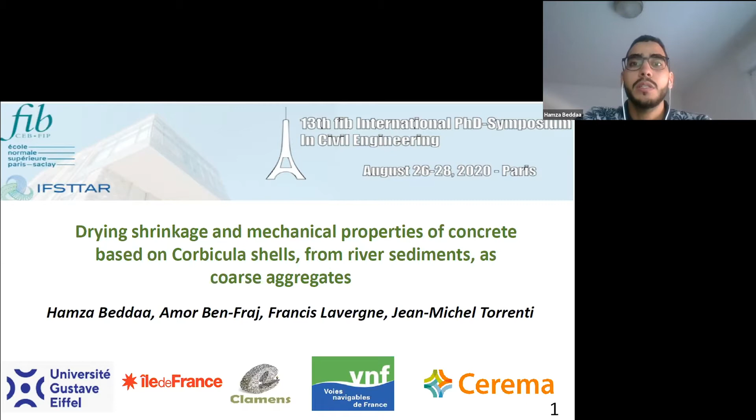So I'm going to present today one of our research results, which deals with the effect of the substitution of coarse aggregate by shells from river sediment on the drying shrinkage and the mechanical properties of concrete. So the sediments studied in this thesis are the sediments generated by dredging operations carried out in the Île-de-France waterways. These dredging operations, which are essential to ensure the transport of boats, generate an annual volume of about 150,000 cubic meters. So these materials are considered as waste, while the analysis shows that 100% of these materials are non-hazardous and 90% are inert.

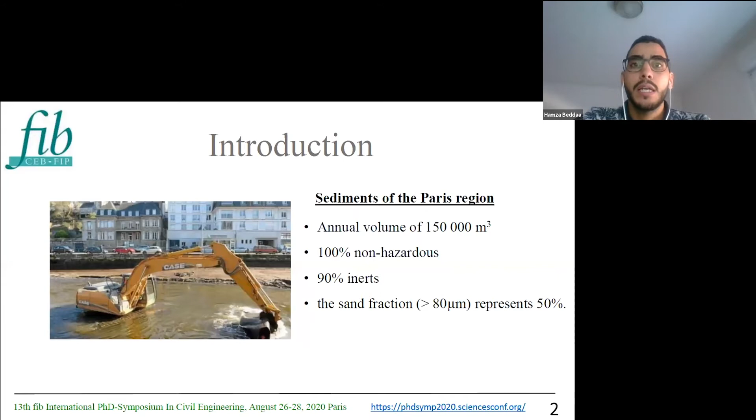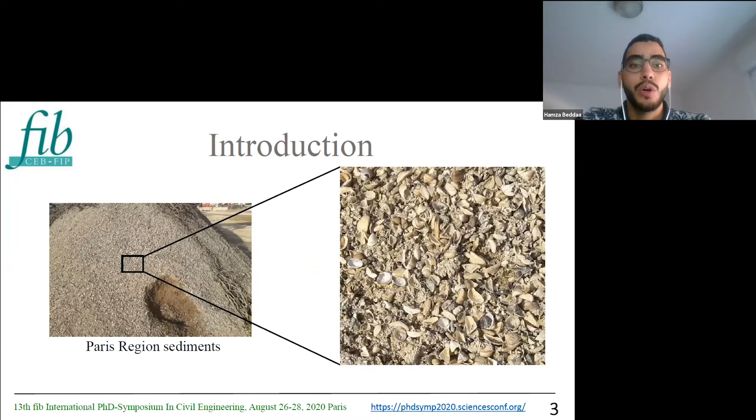And the sand fraction of these materials represents 50% of the total volume. So all this information favors the valorization of these materials in concrete as aggregates. However, this new local resource of aggregates may contain a significant fraction of shells, which can have an impact on the concrete properties. So the shellfish species present in the waterways of the Île-de-France region are Viviparus, Dreissena, Corbicula. Viviparus and Dreissena are light and can be easily removed by blowing or floating, whereas Corbicula are dense and it is difficult to separate them from the sediment by a practical way.

So the incorporation of sediments into concrete means the presence of this type of shells in the mixture, and then the study of their effects on concrete properties is important. So these shells are from 4 to 20 millimeters, the same granular class as coarse aggregate. So we will study the effect of the substitution of coarse aggregate by shells on the concrete properties. So comparing the properties of the shells with those of the coarse aggregate, we can say that shells contain less fine elements. We can say also that the density is less for the shells, and they absorb more water than coarse aggregate.

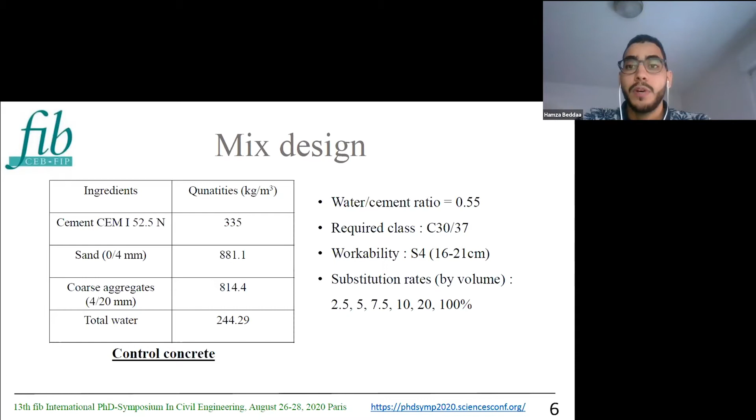Concerning the flakiness index of shells, it reaches the maximum, which is 100%. So this flattened shape of the shells requires more paste volume to cover them, which could affect significantly the concrete properties. So the control concrete in this study is a concrete of C30 class with a good workability S4 slump class, using a water to cement ratio of 0.55. This study is carried out on 7 concretes, one control concrete and 6 concretes based on shells. The volume substitution rates used in this study are 2.5, 5, 7.5, 10, 20, and 100%.

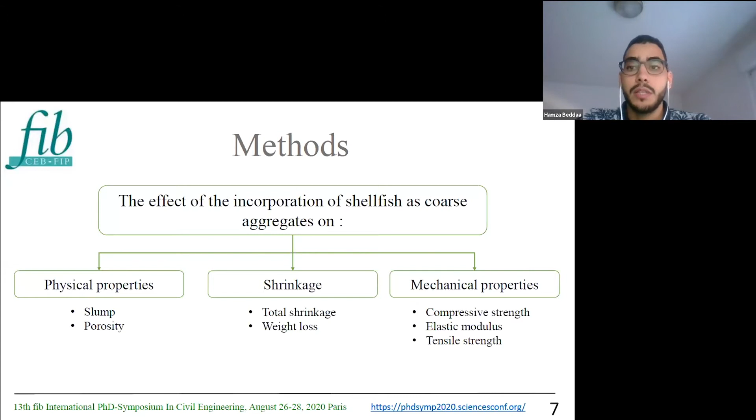The properties studied for these concretes are slump, porosity, drying shrinkage, and weight loss. Regarding mechanical properties, compressive strength, elastic modulus, and tensile strength by splitting are also measured. So we will start with the results of the physical properties. The slump of the fresh concrete was measured using the Abrams cone, and the results show that up to 20% of substitution, the slump of the concretes based on shells is similar to that of the control one. However, a significant decrease of the slump was measured for a total substitution of coarse aggregate by the shells. So the decrease could be attributed to the important paste demand of shells due to their high specific surface area.

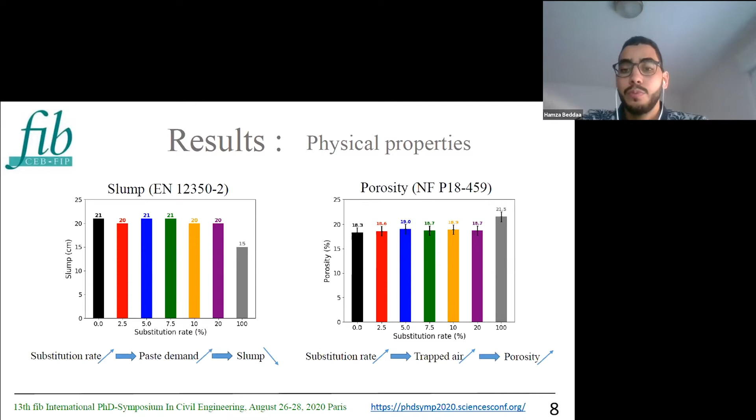So concerning the porosity accessible to water, the results show that the porosity remains unchanged for substitutions lower than 20%, but for a total substitution, we can see a significant increase in the porosity. This result can be explained by the fact that up to 20% of substitution, the air trapped by the shells is negligible compared to the porosity of the overall concrete, while the total substitution of the coarse aggregate by shells makes this effect and this porosity much more pronounced. So the shrinkage test is carried out on prismatic samples of 7x7x28 centimeters.

Show that replacing up to 20% of coarse aggregates by shells doesn't affect the concrete drying shrinkage evolution. And the weight loss over the 3 months has been also measured on the same prismatic samples, and the result of this parameter is coherent with those of the shrinkage. So there is no effect up to 20% of substitution. This finding can be attributed to the use of the same water to cement ratio and the same mortar volume fraction for all concretes.

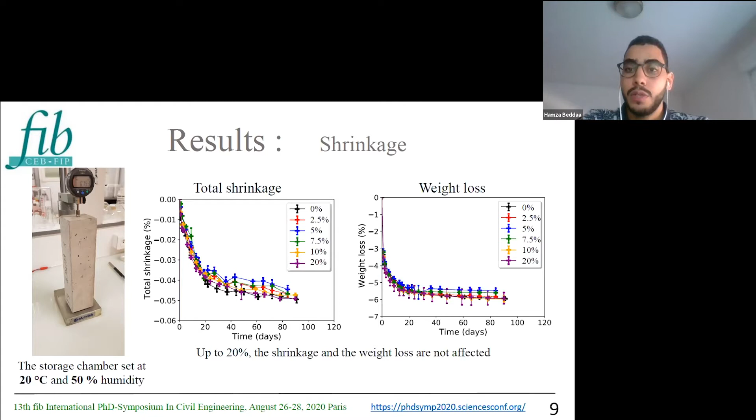For mechanical properties, we start with the compressive strength. The compressive strength was measured on cylindrical samples, and the test was carried out at 28 and 90 days. So for the result, the compressive strength decreases as the replacement rate increases. This decrease is significant, and it is about 21% for a substitution rate of 20% and reaches 62% for a total substitution.

So the effect of shells on the compressive strength of concrete has been the subject of several studies, and the decrease of this property has been attributed to the fragility of shells, which doesn't seem the case for the shells used in this study, or it was attributed to the increase of the concrete porosity, and this explanation also may be the case for the total substitution, but up to 20% of substitution, the effect on the porosity of concrete is negligible, while the compressive strength decreases significantly.

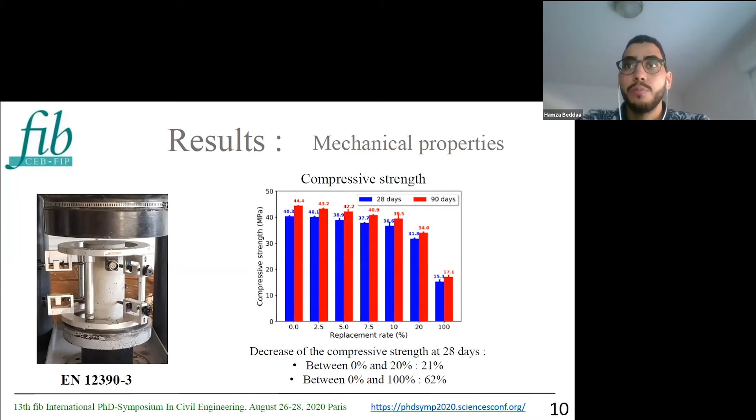But the possible explanation for this decrease seems to be the weak bond between the shells and the mortar. Actually, the observations of the bond between the inclusions and the mortar in a concrete sample show a difference between the adhesion quality of coarse aggregate and that of shells. So an absolute lack of adhesion here and here,

or even detachment could be observed between the mortar and the shell, especially on the outer face of the shell. For the inner face, a high porosity could be observed because of the shape of shells, which favors the air trapping. So the lack of adhesion between the mortar and shells could be the main reason for the decrease of the compressive strength.

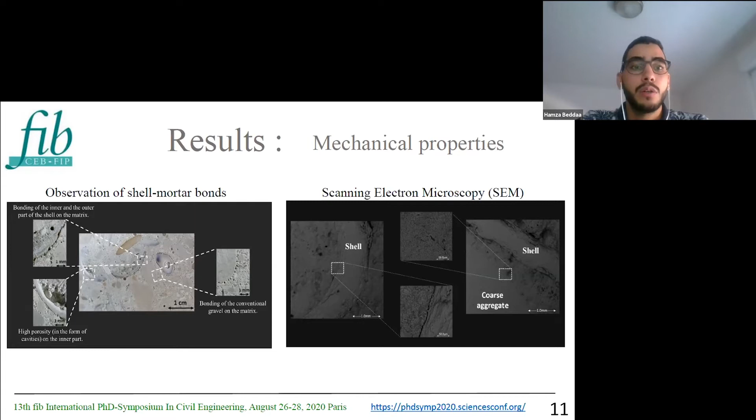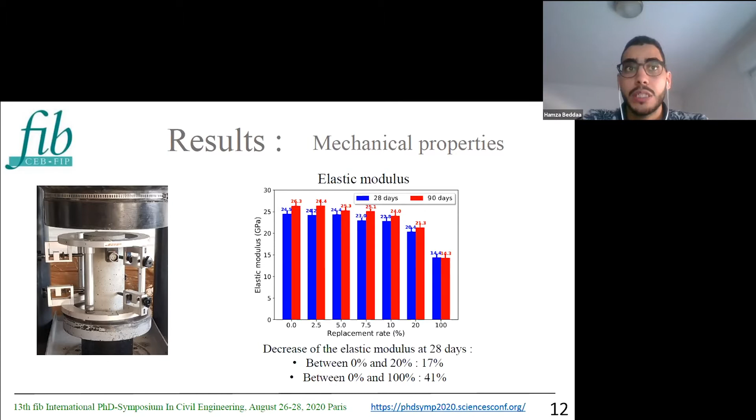So the elastic modulus was measured on the same samples dedicated to the compressive strength. The elastic modulus values follow the same trend as the compressive strength. The possible explanation for this decrease is also the weak adhesion between the shells and the mortar.

The tensile strength by splitting was measured on the cylindrical samples. The error bar of the obtained result is significant, but the averages of this result show a clear trend regarding the effects of the shells on this property. So the tensile strength decreases significantly with the increase of the replacement rate. In fact, this property reflects the adhesion quality between the aggregate and the mortar, and its decrease confirms the weak adhesion between shells and mortar.

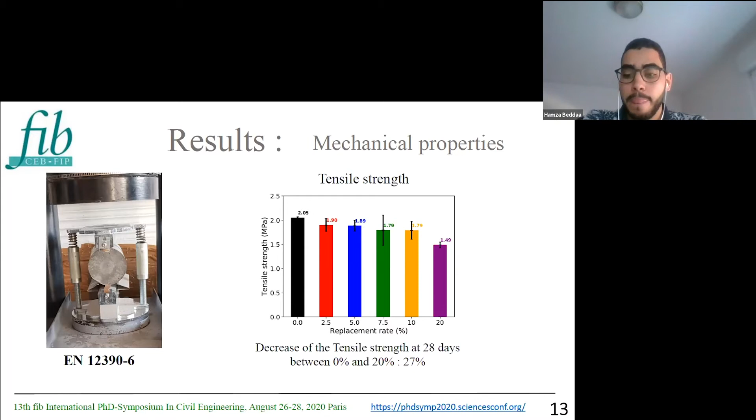So I add to this presentation a simple theoretical part in order to show that if we consider a lack of adhesion between the shells and the mortar, the Mori-Tanaka scheme can provide equivalent values to those found experimentally. So first, the elastic moduli of the different phases are measured. The elastic modulus of the mortar is measured in the same way as the concrete, while the elastic moduli of the inclusions are obtained from the micro indentation test. The Poisson's ratio is considered equal to 0.2 for all phases.

So assuming that the inclusions have a spherical shape, either coarse aggregate or shell, the homogenized modulus of the concrete can be calculated using the Mori-Tanaka scheme for the different substitution rates. The figure shows three elastic modulus values for each replacement rate. One corresponds to the experimental value, and the two others correspond to the theoretical values. The bars in red correspond to the case of a perfect adhesion between the shells and the mortar, while the bars in blue correspond to the case of a detachment between the shells and the mortar.

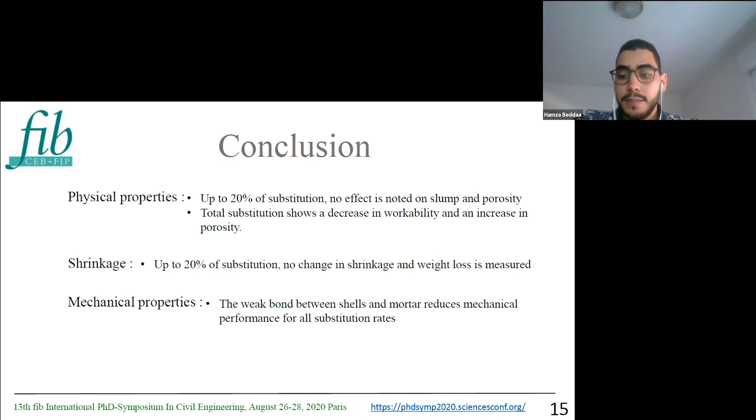In contrast, mechanical properties decrease for all substitution rates. This decrease has been attributed to the weak adhesion between the mortar and the shells. This is the end of my presentation, and thank you for your attention.

So thank you very much for a very interesting presentation. And now we will start with questions. So maybe I will start with one.

In fact, you mentioned that you are using the shells in full size, but you also mentioned that because of the shape of the shells, there is more danger of air bubbles inside the shells, and that there is also a problem with remaining air bubbles. So the question is, did you think of or test whether these Corbicula shells can be milled, crushed to small parts, and what will be the effect on the final mix and concrete?

So we didn't test this part, but we look to do that after. But I don't have any results about using the shells as sand or as small parts. But the effect of the interface, I think, will be here whether the shell is as we use it in this study, or as sand.

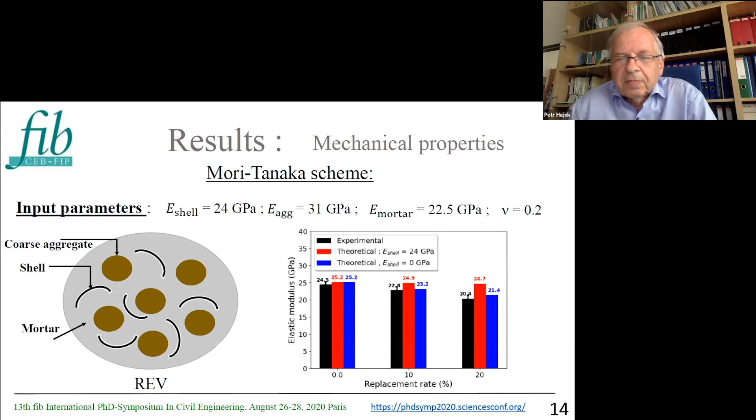So Vladislav, I have the same questions as you about shell crushing. And I ask another question: what is the volume weight of your hardened concrete? Is it suitable for light concrete, or is it normal concrete with shells? Yes, it's a normal concrete. The density of our concrete is about 2.5.

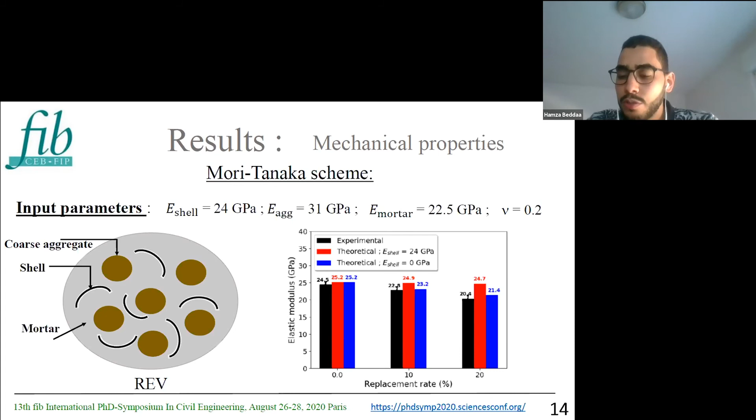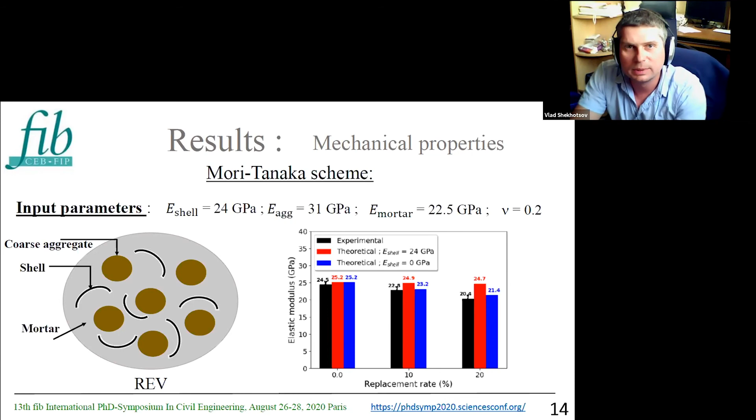It is very interesting. What is the volume weight of the shell in comparison with coarse aggregate, for example? I didn't hear the question. The volume weight of the shells in comparison with the coarse aggregate, for example when you use only shells. If shells have lower weight than the coarse aggregate, I think the volume weight of the hardened concrete must decrease.

Yes, if we use 100% of shells, we have 2.4. So there is not a big difference because the density of the shells is also good. The density is about 2.2 and the density of coarse aggregates is 2.5. So if we use 100% of shells, we don't have a significant effect on the volume weight of the concrete.

But is the quantity of shells in 1 cubic meter, in weight, the same as that of coarse aggregate? I didn't understand the question. It's about the volume fraction of shells, or about the difference in density of shells. I understand the density, but the volume of shells in 1 cubic meter is not the same as the volume of coarse aggregate. No, the substitution is made by volume, not by mass, so the same volume is replaced by the same volume. Okay, I understand.

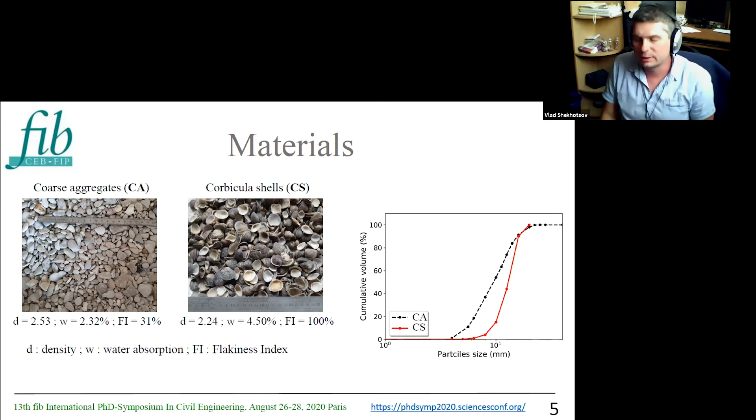Okay, but you mentioned that one idea is that you can excavate the sand, including the shells, from the river. What is the typical fraction of shells in this sand? Because if you would like to use it directly without separating, and you said it is difficult to separate and then mix, you can do it in the laboratory, but in practice the idea is probably to use what is excavated from the river. What is the typical fraction of shells in this sand?

It differs from one dredging point to another, but I don't have any numbers for the fraction of shells in the overall sediment of the Île-de-France region. Okay, I just ask about a typical one. I don't have an exact percentage overall. We can say 10% at one dredging point and 0% at another. So it's different. Okay.

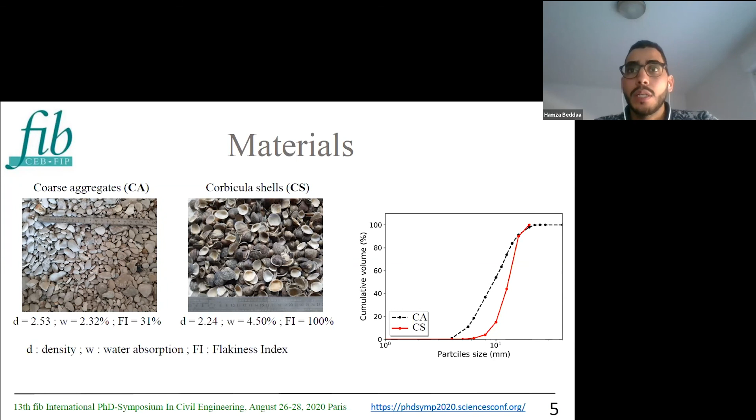The last one is by Farid. Thank you for your presentation. Regarding cracking risk by shrinkage, there are several parameters to take into account: shrinkage, Young's modulus, tensile strength. Is it possible to say if incorporation of shells will decrease or increase the risk of cracking by shrinkage? I don't know. You didn't test. No.

And the last question is by Jean-Michel Torrenti: in fact, in the Paris area where these sediments are, freeze-thaw is not an issue. Yes, so freeze and thaw is not a problem for this area. This was just a comment.